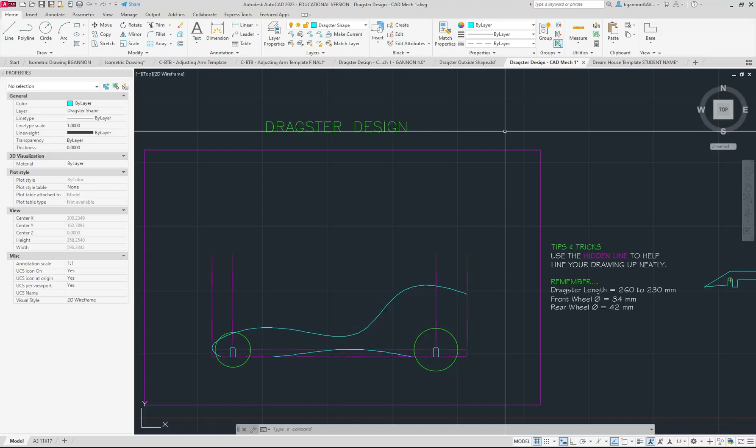Okay, so here in video 2, we're going to take a look at our specs real fast to make sure we're staying within our constraints. We can see here the body height with the wheels is a max of 90 millimeters.

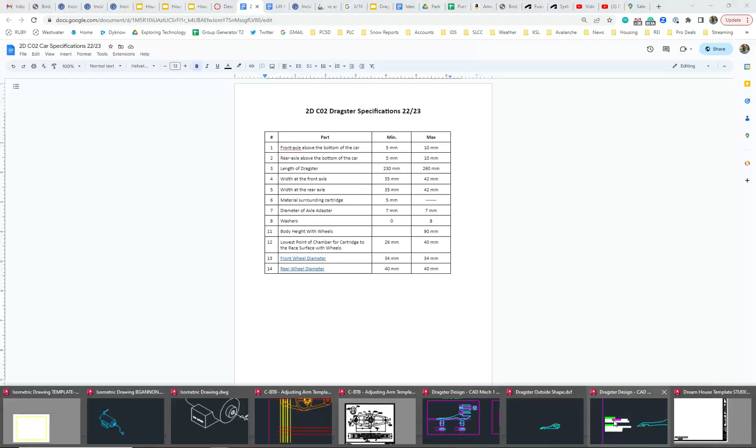So coming back over here to our dragster design, I want to make sure that my wheel, from the back wheel here to the top of my car, is within 90. I'm going to turn on my ortho mode and my object snap, and draw a line straight up here. Let's see, I might be pretty close here. But 90, yep, I am within the constraint.

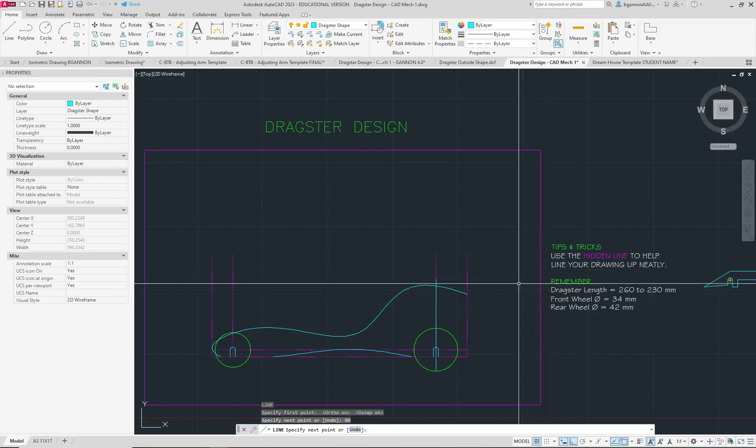You can see the top of my car here, and I can draw a line straight across if I wanted to. I'll extend this the other way here. This would be my max top of my car right there. That's something you might want to add in from the beginning if you did not add that in already.

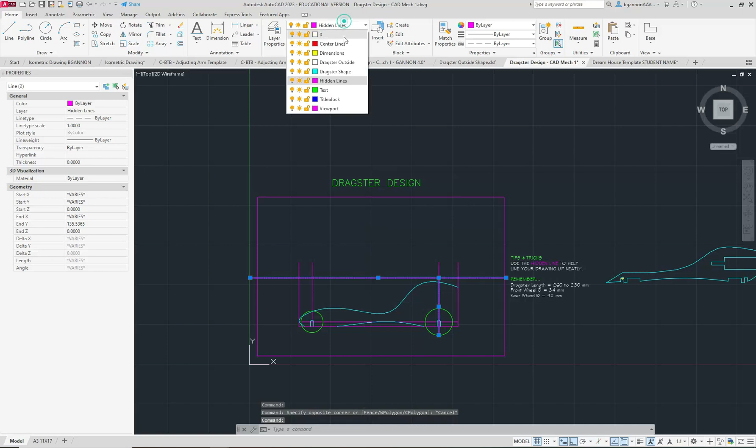And we'll put that on my hidden line layer. Cool, just like that, and I'm actually going to delete this one for now. And that one too. Cool.

Okay, so now let's focus on drawing out our cartridge area here. A couple things with the cartridge area: if we look at our specs, the material surrounding the cartridge needs to be at least 5 mil. That means you need to have at least 5 mil going around that cartridge.

You can also see the lowest point is 26 to 40 from the race surface. If you want to measure that out, you can, and that allows us to line it up when we want to actually puncture the cartridge. And then we look here. So let's take a look at...

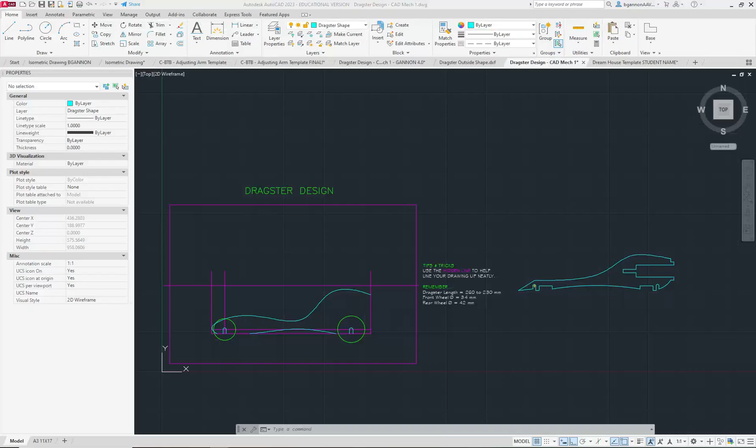AutoCAD, and we'll take a look at my cartridge here. The space for the cartridge that you're going to need here is a length of 58, and then a height. I'll just draw a line so we can see this here. That line right there is a height of 19.

So I'm going to start here, just pick a general spot on the back of here. I'm going to turn on my nearest snap real fast, and draw a line just in my dragster shape, right about here, going out. And this one's going to be 58.

And then I'm going to offset this half of 19. Half of 19, do some quick math, is 8.5 - nope, sorry, half of 19 is 9.5. Yes.

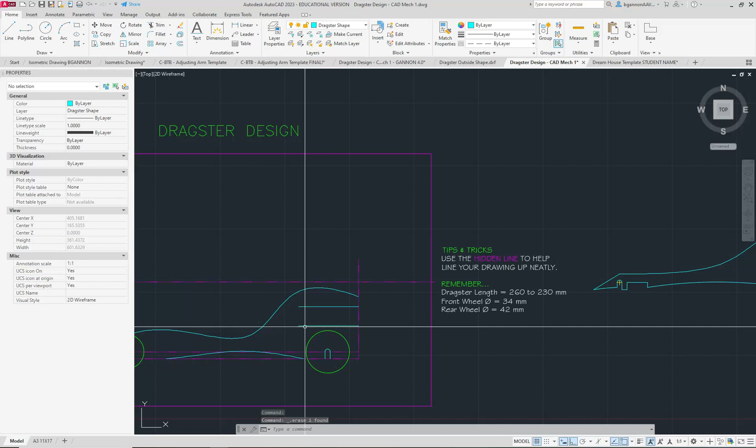So offset 9.5, coming up and coming back down. My cartridge is going to be fitting in the center there. And then I'm going to draw another little line here, going straight up for right now.

And then if we look over here, this little gap that I have allows me to slide in my separate piece that I need to, so I get my three-dimensional look on my cartridge. This piece here is going to slide into this gap right there.

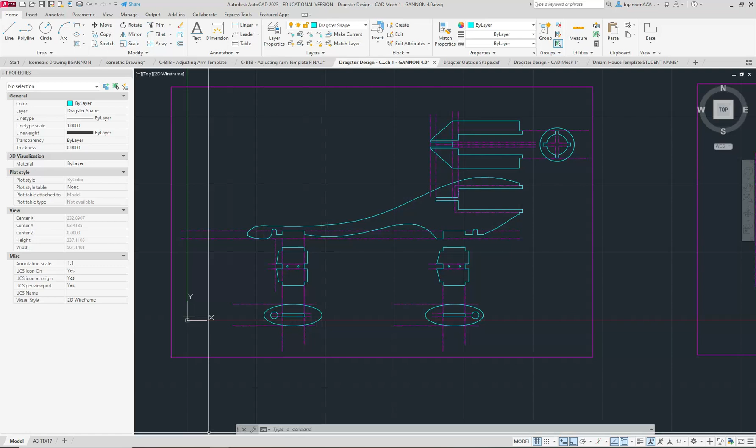To do that, there's lots of ways to do all this here, but I'll show you how I'm going to do mine. So I'm going to offset this by - we're going to keep this pretty small this time, so 15. And we'll see if I have enough room there.

I barely do, so I'm going to actually just move my front of my car a tiny bit here so I can stretch this design out kind of like that, and bring this down like that. There we go, that looks good. So 15, and then I want to draw a line here in the center.

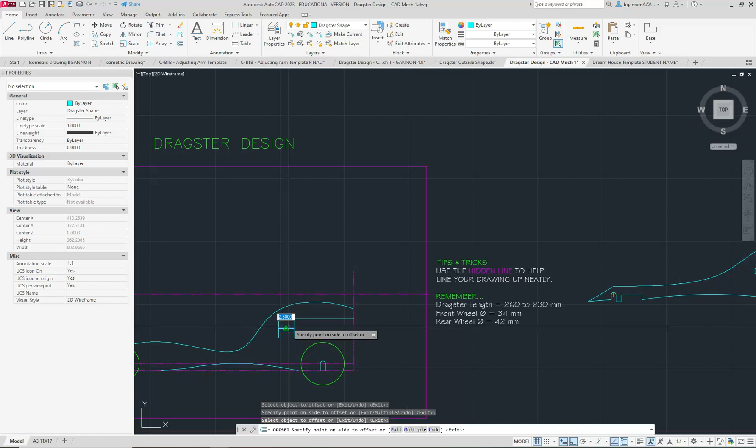I'll offset this by 5, because the thickness of all the wood we're working with is going to be 5, and I'm going to go up there. I can delete that center piece. Then I'm going to trim this out right there, trim that out right there, and this piece out right here.

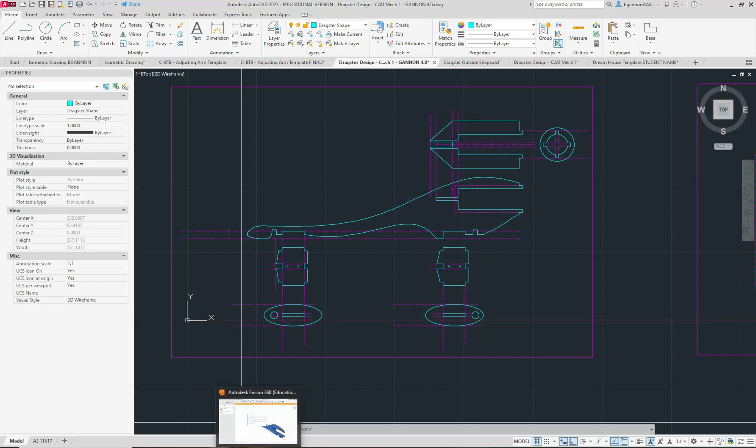A couple other things you want to pay attention to: we definitely want to have a back bracket piece. This piece actually slides onto these little end caps right here, those little pieces right there. To do that, I'm going to add on here. Actually, I'm going to subtract from the car a bit—I think it'll work a little better.

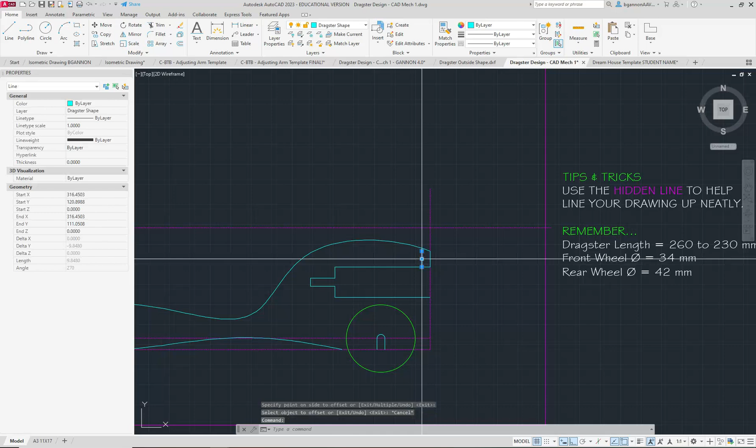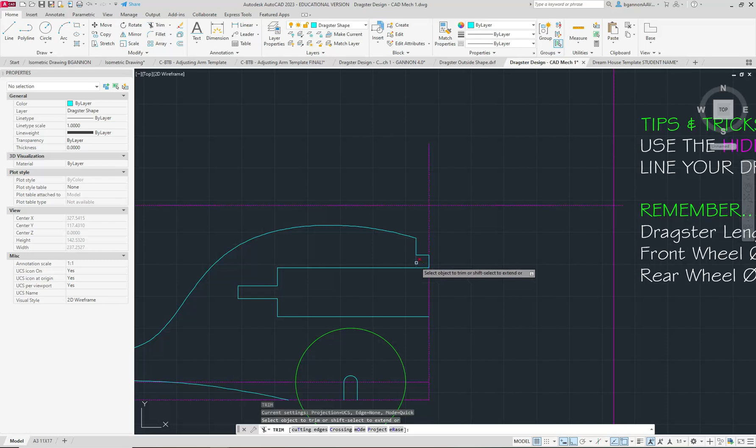So again, I'm going to offset and draw a line here in the back, like so. I'll offset that line by 5 going in, and then extend it up here like that. I'm going to offset this line by 5 going up, and then trim this out. So I don't need this anymore, don't need this, don't need this, don't need that. Oh, one more piece I don't want—let's make sure, yes, that piece there, because this is where the cap is going to slide on right there.

I want to do the same idea back here. I'm going to take the spline tool real fast and draw this area out. Let's turn off my snaps, and let's do something kind of like that. Getting crazy. I can move this around too if I want to—move this down here. I just want a little curve on the back coming up, a little flare. There we go, that looks good.

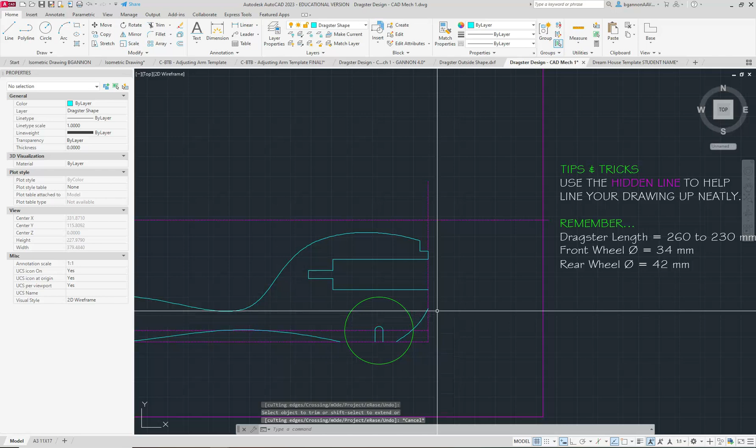And then I'm going to trim that out too. Trim, trim—that looks good. Then I'm going to draw a line, doing the same thing I just did on the top. I need to turn on my snaps. Control Z. And snaps back on, boom.

And I want to go there, and offset by 5, boom. Okay, I want to offset by 5 again. I'm going to do the same thing I just did here, so TR for trim, and I want to double check what I want to trim out here. I got to think about it for a second. We don't need this, let's get rid of that, this—I don't want this, I do want that piece, do want that.

Then I just got to think about where it's sliding on, so I actually want to bring this in a bit. This needs to be offset by 5. Then extend this down, and then trim that out too. Boom, boom, we can go like that—that's fine for now. And then I don't need this piece right here too.

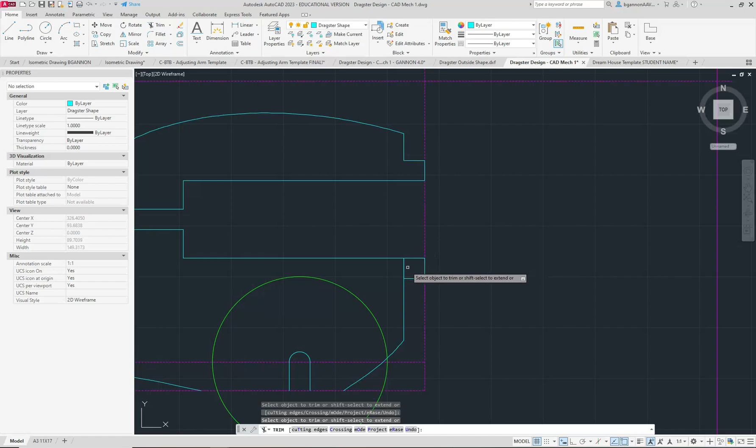Cool, all right, so this is where my cartridge now is going to be sliding in. I'm going to have a little cylinder that I'll have to build out too, that's going to snap on the back here. All right, this is going to be the end of video 2.

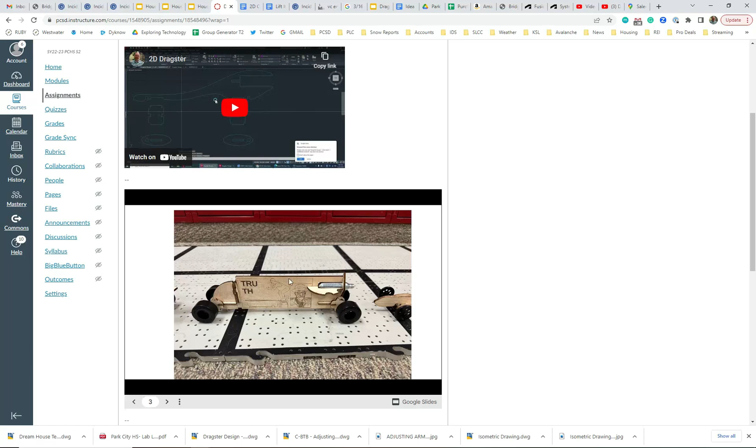This should get you a good start on this project here. There's lots of ways to do this, but remember, if we're looking at my example on Canvas, there's this one example that all of you can see here. For this example, you need to have all these separate pieces created, and we're going to be laser cutting them and gluing them together. We're using 5mm balsa wood for the entire construction, and we're using glue this time too, so it doesn't need to fit together like a joint—it'll just fit together and then glue it with a little bit of wood glue. Sweet, all right, end of video 2.